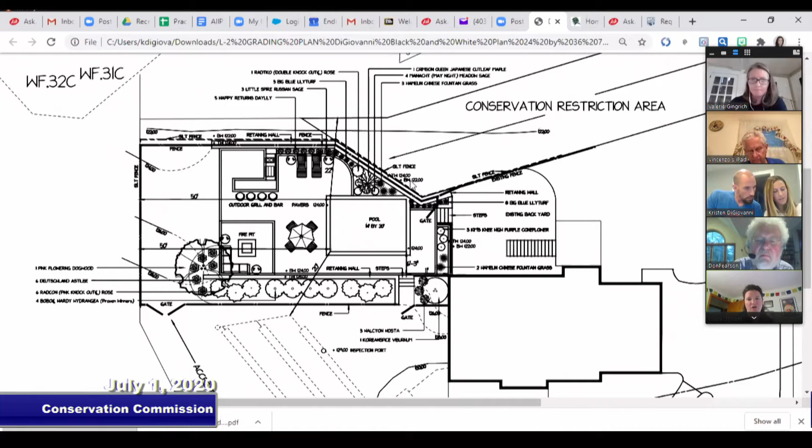Okay, so looking at the engineer's comments, there were pictures, but I couldn't really see the stone markers you mentioned for where this restriction area is. I wasn't sure which rocks they were. That's why I think it would be important to have that area staked out, because you can't see it, and the wall that they've already started building is within that area.

So the retaining wall you see makes that angled shape on this plan - that's the edge now. It was built in a straight line, and it went into that conservation restriction area. So then we'd be pulling it back. Right, okay.

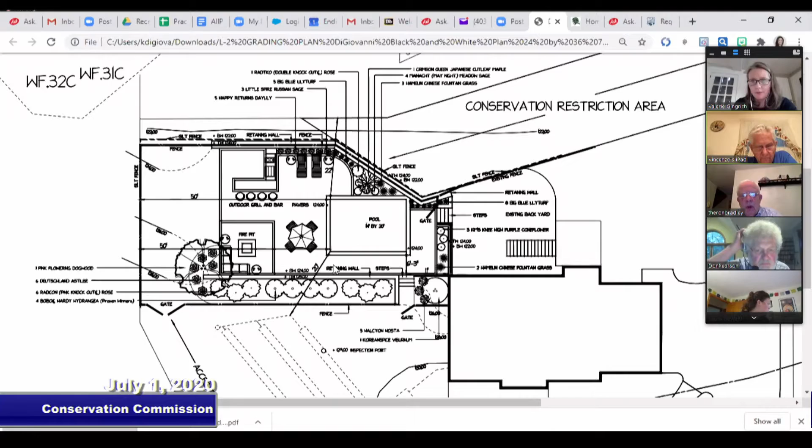So it does kind of an angled shape right along with the wall that they're proposing. Let me just look through my emails really quickly to see if I can find the plan I sent - we have an as-built plan for when the house was built, and I'll try to pull that up here. Here we go, let me just share my screen. Okay, so on this plan, this is the as-built plot plan that shows the conservation restriction area, which I've highlighted.

Yep, and you'll see that it does this angled line right here. So their proposed patio is back here and actually kind of runs into this area currently. So they're going to pull that back and follow this line to avoid this area. Okay.

I see the wetlands area, and it's not clear to me how far out that extends, whether 25 or 100 feet. Can I assume that's approximately the edge of the conservation restriction area? Well, you'll see this line right here - this is 67 feet from the wetland point here to the septic system. So using that as a gauge, I would guess that the work they're proposing is at least 30 plus feet from the wetland. Great.

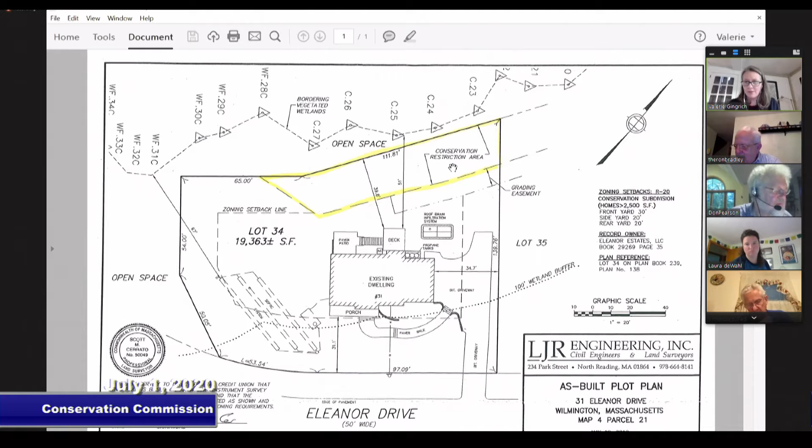Mr. Chairman, I'm not sure if we have anyone here to represent this tonight. I'm looking through the crowd and I don't see anyone, but if there is someone here for this, they can just raise their hand to indicate that, and I'll get started. Let me just stop sharing my screen.

This proposal is for a small concrete pad to place a hot tub on. This is in the buffer zone, an 8x8 concrete pad, and then a 12x12 deck extension in the back of the house. The BVW is about 55 feet away, so this is within the buffer zone but is quite a distance from the wetland.

Is it something we can go ahead with in the absence of the applicant? Yes, I think so.

I'll note that the application did state that work was proposed by hand tools, so they weren't proposing any erosion controls, and the topography didn't seem to indicate they would need them, but we can always condition that if you'd like. Did the engineer recommend erosion controls? Let's see. Yes, they suggested the applicant install temporary erosion controls, either staked hay bales or straw wattle, along the southerly side of the existing driveway. So yeah, they do recommend erosion controls and an as-built.

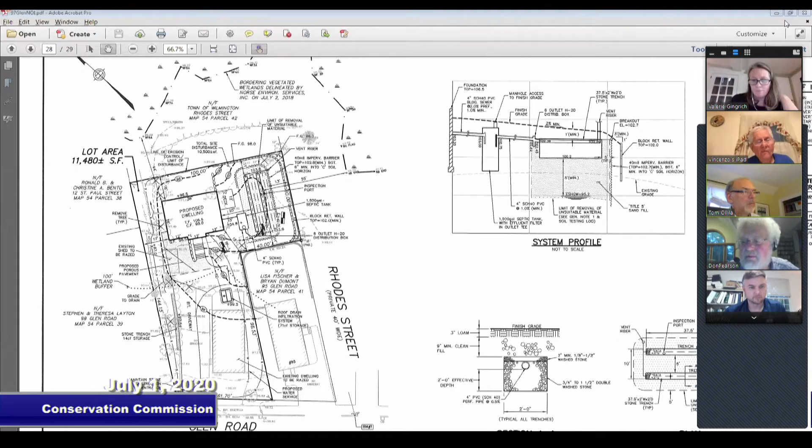So I'm looking for any questions or comments from the audience for 97 Glen Road. So far, Mr. Chairman, there are no raised hands. We do have a couple callers on the line, so maybe give a few seconds to let the TV catch up with our meeting.

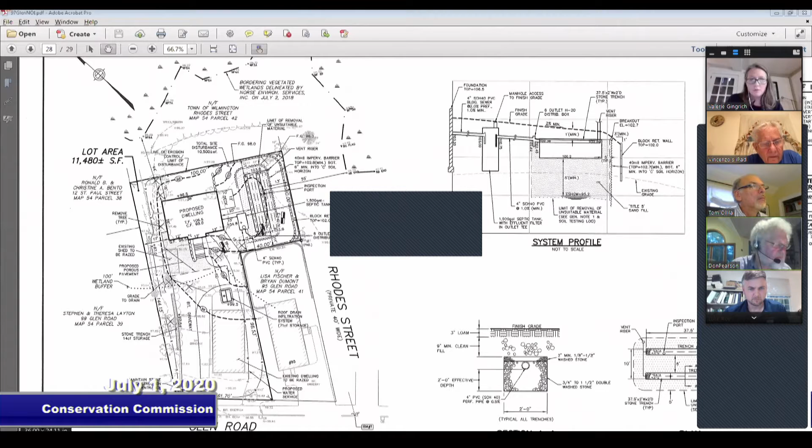No raised hands. Okay. So could I have a motion to continue the public hearing for the notice of intent for 97 Glen Road till the August 5th meeting?

Vinnie made the motion. Do I have a second? Second, Ron made the second. Voting, Tom? Yes. Mike, muted. Yes. Ron? Yes. Vinnie? Yes. Laura? Yes. And myself, yes.

So the next item is a public hearing for a notice of intent for 11 Kendall Street. Thank you. Again, Luke Roy, LJR Engineering, on behalf of the applicant, Michael Tachuk. This is a notice of intent we've submitted for 11 Kendall Street. Just let me pull it up here.

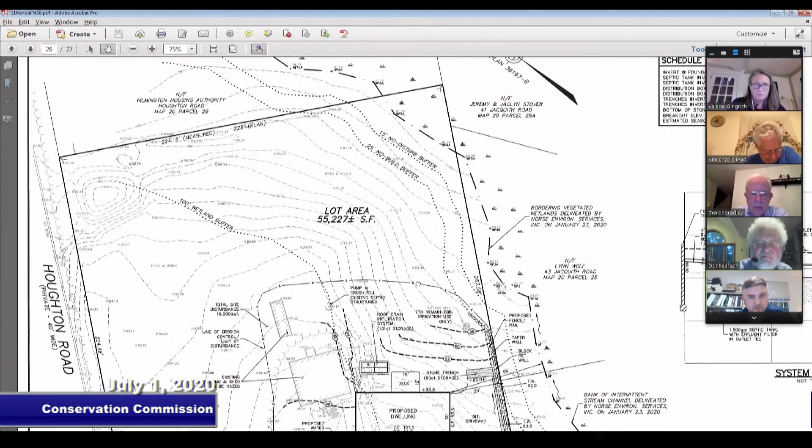This one is also in the groundwater protection district, and it has quite a bit of land area. So the percentages, if I remember correctly—where did I put that chart—it was just at 6.5% of the lot area that is impervious, with the house roof and the driveway area for the lot as it will be constituted for this development. So that's the proposal at this time, and I'd be happy to answer any questions.

Thank you, Luke. Valerie? Sure. Thanks, Mr. Chairman. Again, Bill Holt from the Engineering Division did a site visit to look at the wetland lines and confirmed that they were in the appropriate place. We did receive some comments from the Engineering Division, geared more towards the proposed retaining wall on the side property line adjacent to the 25-foot no-build.

That wall will be certified, designed by a structural engineer, and that will be submitted for review prior to building permit.

I had a question, Luke. It was a little unclear whether the infiltration trench, the stone trench, was going right up to that retaining wall, and whether infiltration should be encouraged along that wall, or if it would be designed to allow for that. Also, could the driveway and dwelling shift a little to the left on our screen, to pull it away from that property line, and maybe lower that wall or eliminate parts of it. Those were the questions, and also confirming that the wall could be constructed entirely within the property boundary as proposed.

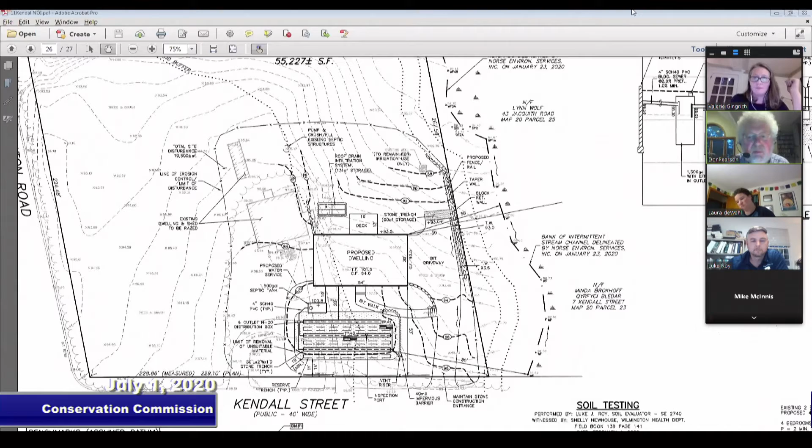No raised hands. Okay, I'm looking for a motion to continue the public hearing for the notice of intent for 11 Kendall Street to the August 5th meeting. So moved, thank you Laura. Second, Vinny, thank you very much.

On to the voting, Mike. Muted, yes. Tom, yes. Ron, yes. Vinny, yes. Laura, yes. Myself, yes. Thank you. Welcome.

The next item on the agenda is a request for an amendment to the order of conditions for 93 McDonald Road.

Good evening, for the record my name is Elizabeth Wallace from Hayes Engineering. We are asking the Conservation Commission to consider an amendment to the order of conditions to allow the inclusion of a constructed patio to be accepted and included in the order of conditions. The order of conditions was issued in May of 2018, and it basically allowed the construction of a single-family house and all appurtenances. If you're kind enough to allow me to share my screen, it would be easier to point at a plan. Hold on a second.

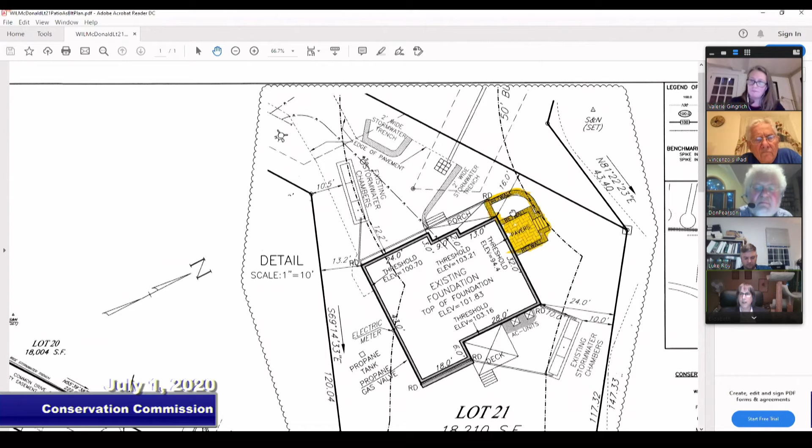Besides the pavers, are we doing anything else to remove any rain liquid that accumulates down there? I don't know, there is this stormwater trench here that will carry the water away. There was also another little trench added at the time, I don't know if it's still there, but when we replace the pavers with pervious pavers, that will allow the rain to infiltrate into the ground.

Okay, I'm all set. Tom, no questions? Laura, no questions. Mike, all set. Ron, good with it. Okay, as am I. Are there any questions or comments from the audience?

In fact, do we need to ask Valerie for an amendment? Yeah, you would want to ask for the amendment. All right, anyone interested in commenting from the public on 93 McDonald Road? So far, Mr. Chairman, we don't have any raised hands so far. And we still do not have any raised hands. Okay.

May I have a motion then to— So, Mr. Chairman, if you'd like, since this is an amendment to the existing order, all we do is reference the new plans, and in this case, we would require that the pavers be pervious, but all of the rest of the order stays the same as the original document. So it's pretty straightforward. If you would like to close the hearing and issue this amendment, I think you could without seeing it because it's so simple. But if you'd like to wait till next time, that's up to you.

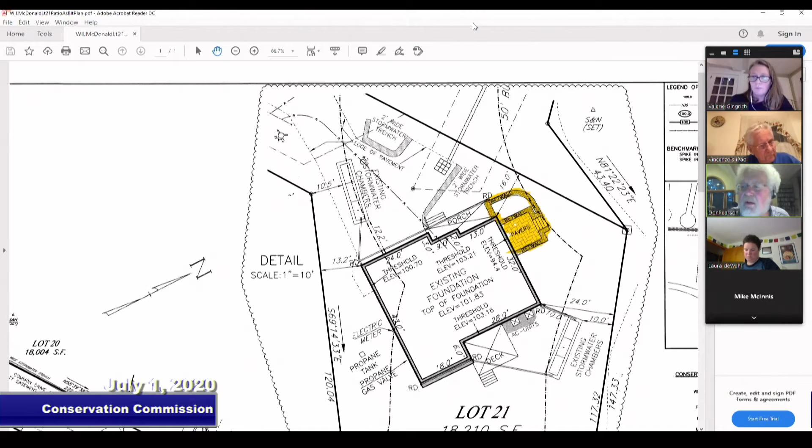So we are now going to have a motion to approve the request for amendment to the order of conditions for 93 McDonald Road. And you would want to condition that the pavers be pervious, correct? That's correct, yes. Okay, great. Thank you. Anyone make that motion?

So moved, Vinny has made the motion. A second, please. Second, Ron, thank you. For the vote: Tom, in favor. Ron, in favor. Laura, in favor. Vinny, in favor. Mike, in favor. And myself, yes, in favor.

The next item is marked as requesting to continue. Is that okay? Correct. Okay, they've asked to continue to the August 5th meeting. Fine. I'll make a motion to continue the public hearing for a request for amendment to order of conditions for 635 Main Street to the August 5th meeting. May I have a second?

Second, thank you. For a vote: Mike, favor. Laura, favor. Tom, in favor. Ron, favor. Vinny, in favor. And myself, yes.

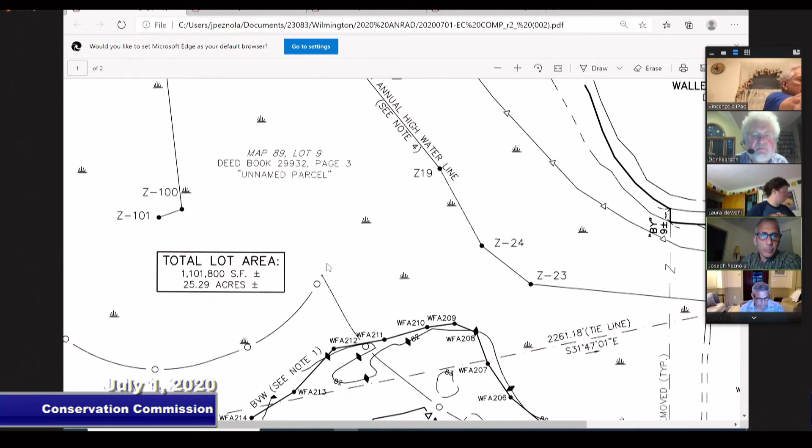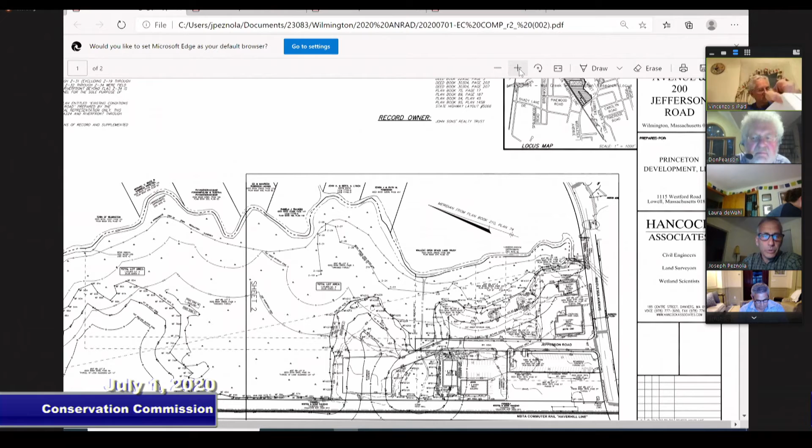Maybe I'll just zoom out a little bit. Middlesex Ave is to our right, and here the existing retail and the back parking lot are here. The BVW line kind of winds its way through here, and then the Lubbers Brook is our northerly property line, and we are talking about the Z line, which is the riverfront line, and in particular, back here on our west portion, we had originally just stopped at Z31 because we felt that that was sufficient to delineate the riverfront in the area that we needed it to in the project area.

There was a call to extend that. We extended it in a direct westerly direction with 32, 33, and 34. There was discussion and some maybe disagreements with that delineation. So we moved in a southerly direction, looking in this wetland area for evidence of flow, whether it was soil erosion around tree roots or water staining or what have you.

We kind of came back to around this location, and there seemed, looking out to the west, there seemed to be some evidence of a change. And on the ground in the muck, there was maybe a reduction in some of the evidence of water movement, which is really what we're looking for. We're looking for mean annual high that's related to the movement of the river.

So we talked about setting flags. We set a flag, which we call Z100, and then we set Z101 as kind of a directional flag to see what that would cast for a riverfront. And as you see, when we look in this direction, we have the inner riparian and we have the 200 foot, and that riverfront line that is kind of driven by Z24 does take an angle and start to head up this way, but it quickly passes over the BVW line. So we feel that the delineation is sufficient.

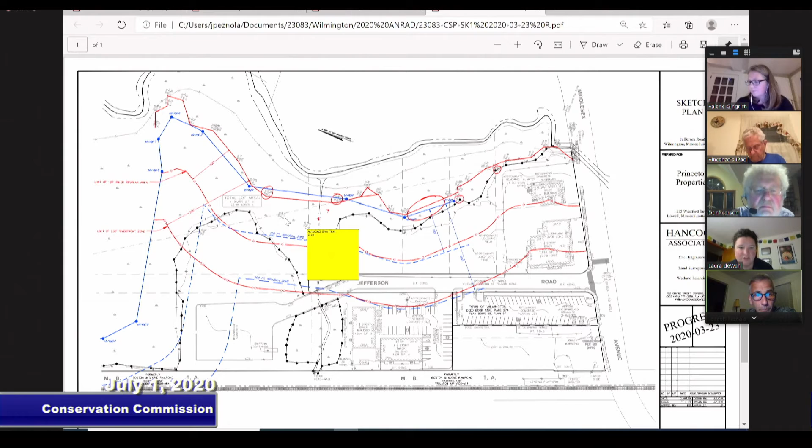Do you have a plan that has the other flags, just to show the other commission members? Which flags are you talking about, Don? 21, 22. On the plan that's up right now, they're right here. 22. Okay, I just can't see them there. But then that's a lot closer.

There's little red X's that I'm assuming represent 19 and 20. So I wouldn't think that if we discounted the existence of the intermittent stream temporarily, the high water would go all the way up to 22 and 21, but I do think it would come out within Z18.

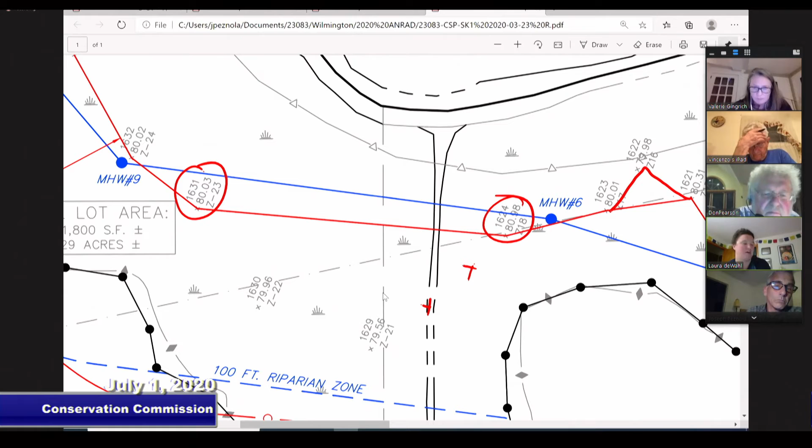To which? I'm sorry, Laura. So right now you have the jump across from Z18 to Z23, and right there the oxbow, the elbow on the river, is bigger than in other places. Especially the upstream is a little straighter, so you'd have more velocity coming in. I'm trying to gesture at the drawing, that's not working.

So you'd have more velocity coming into that elbow. I would almost like to see your jump across go from Z18, Z19, and then to Z23, or even up to 20 to 23. Not necessarily including Z21 or Z22, but I'd like to see that area come out a little more to show the velocity of the stream coming in, especially at high water, would likely come out further than where you currently have the jump across.

Yeah, so I see your point. So from Z20, which is here, to okay, Z23? Yeah, or the next X over. Yeah, I couldn't make up my mind on which one I liked better, but just one of those.

Yeah, because I could definitely see water pushing that far up the intermittent stream in high water flood conditions. And then I think, with respect to you guys, it doesn't really change the area too much, but it does make a difference in terms of showing where the high water is most likely. Yeah.

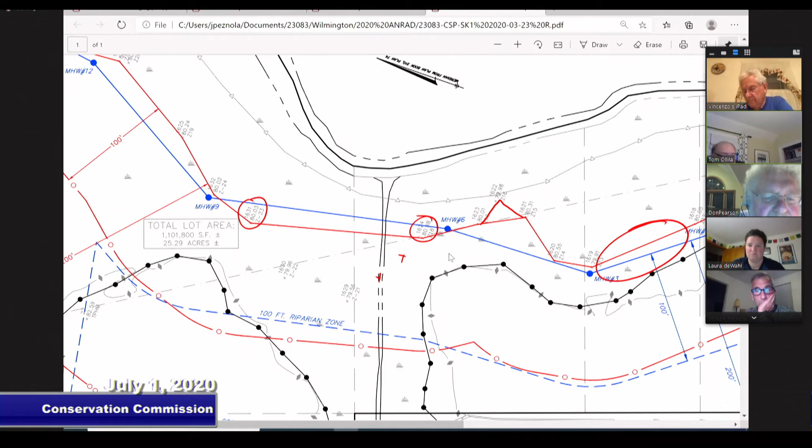I mean, our position is that there's a realization that you have the muck line and things happening in here. So going back to our premise, there are flags that we're not utilizing. Looking back at the settlement plan and figuring it was good enough for an ORAD, it was good enough for this, and that's our position.

I think we could work with a flag in this location that kind of moved towards 23. I just don't, logistically, we'd need to finish this up. So tonight, I just...

And like I get what you're saying about the previous line for the ORAD, but looking at the shape of the Lubbers Brook as it comes into there, it's coming out of a pretty straight shot that would, if you follow that down, kind of go up towards the intermittent stream.

And so where you have the high water line, like Z23 to Z28, is kind of far out. And then we cut in really close where this area of potentially higher velocity would be coming through. So I think it doesn't make sense. I mean, knowing the intermittent stream is there and there's probably going to be influence, but in terms of a high water condition, I think you would definitely be having water going further out than Z18.

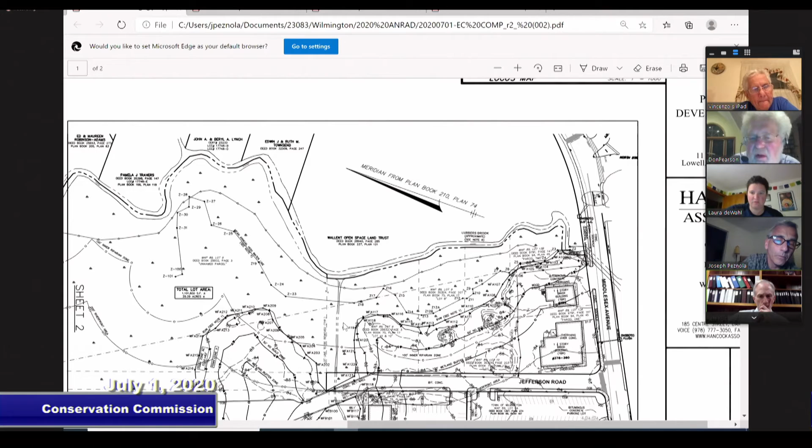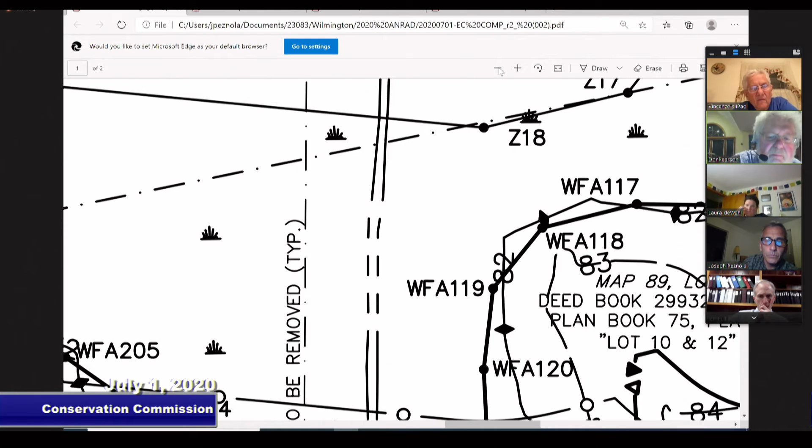Because I also feel that going straight across is not realistic. Move a little bit to... there we go. The line that's pretty much perpendicular to the river.

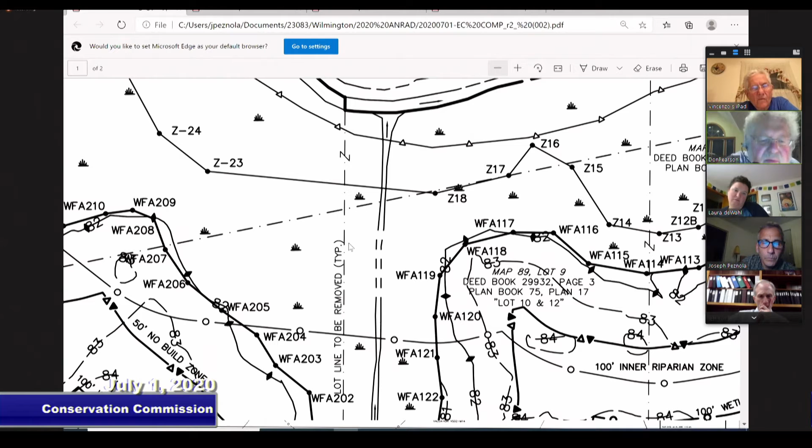Yeah, how about the intersection of these two lines? Yeah, that'd be as real as anything. And then it's reproducible as far as, you have this plan on the record. We can go to that point and we don't have to, we can move forward.

What's the large dashed line? Which one? Yeah, that one. Moving this way? Yes, that's right, at an angle. Yeah, it's a traverse line, a survey traverse line. Okay, so the intersection of that and the vertical.

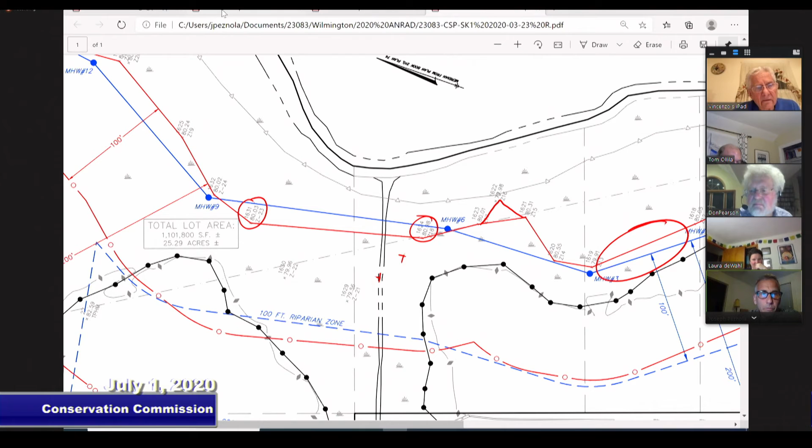Who did that? And our response to that comment—Vinny's reading from the BSC letter, which is dated today. Your letter, Joe, today that you responded to BSC's comment. That's what I believe Vinny is responding to. Right, just get to that point, it's down at the very end.

What's the range of flags they're questioning, Vinny? Can you just say that again? Z1, Z31? Okay, so it's questioning Z31 to Z34. There you go. I'm having problems scrolling through this.

While Joe's trying to find that, this is David Cowell, I'm a senior wetland scientist with Hancock Associates. Go ahead, Dave. This response earlier today, I've attested that I have walked every single flag out there. In my professional opinion, I agree with the flag series out there. So all of these flags have been reviewed by a senior qualified wetland scientist.

Essentially, what BSC is saying is that it should have been originally done by a qualified wetland scientist. The way that we did it, we went out and instructed the survey crew what they were doing. We contend that a professional land surveyor is highly qualified to gather data—that's what they do for a living. So they were instructed to follow the leaf stain line, the muck line, what have you, to locate that as they move through. Then David Cowell, senior wetland scientist, went out and verified that those flags were set in the appropriate place. I don't think the original letter from BSC had any major issues with the location. They did say maybe put some more flags in there, between 10 and 13, and we did that.

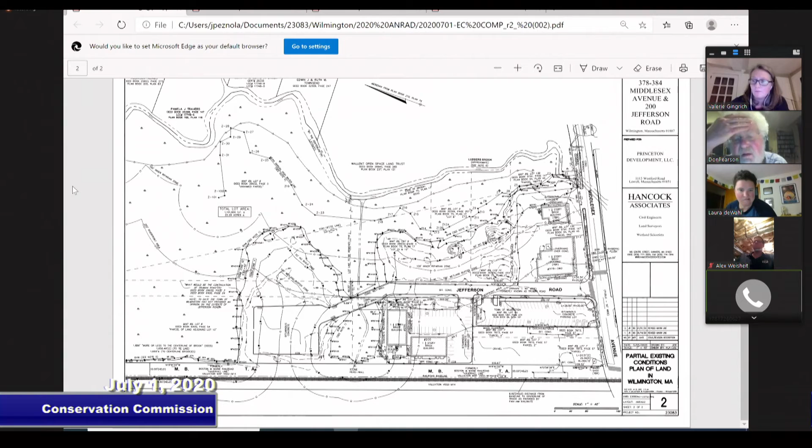The very first thing I'd like to address is that in the last public hearing with the applicant, there was a comment that the original ANRAD was silent on the mean annual high water line and the riverfront area, and that's absolutely completely false. At that time we couldn't locate our copy, but we did locate one from one of our members, and that is absolutely not true, that the Conservation Commission was actually really vocal about the mean annual high water line.

And once again, that commission agreed with the Headwater Stream Team, and there was only one area of contention, which was not relevant to this site, but relevant over to where the island was, where there's a swales area, which we still think could potentially impact this site, or could impact any future filings if they're going to file an NOI down the road. I would caution them that when they file the NOI, they might want to make sure the riverfront area is delineated properly as it relates to where they want to do their work. So I just want to put that out there, because that could be a bone of contention and end up in appeal, because that could definitely put riverfront area on this site.

The second thing I'd like to address is the USGS, the Mass GIS map that I supplied to the commission. It's really important to look at that, because I was kind of shocked myself. When I looked at the ANRAD, I started to think, because on the original ANRAD, an intermittent stream was never identified on this site. It wasn't identified in the ORAD process. And I asked whether or not it's going to be identified in the ANRAD as an intermittent stream. Is that part of the resource area delineation?

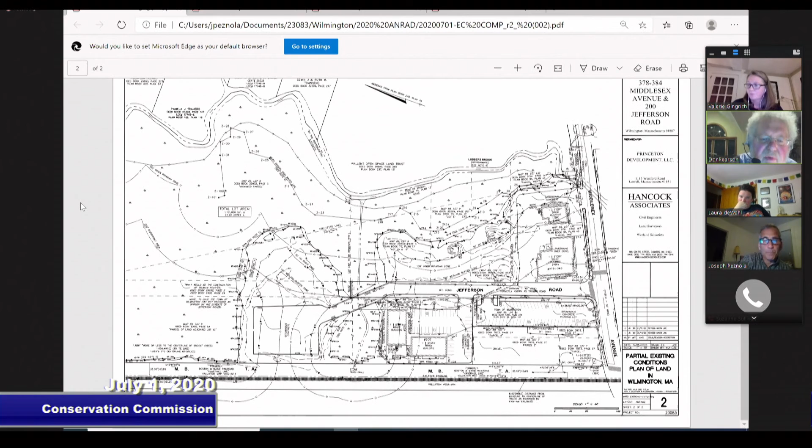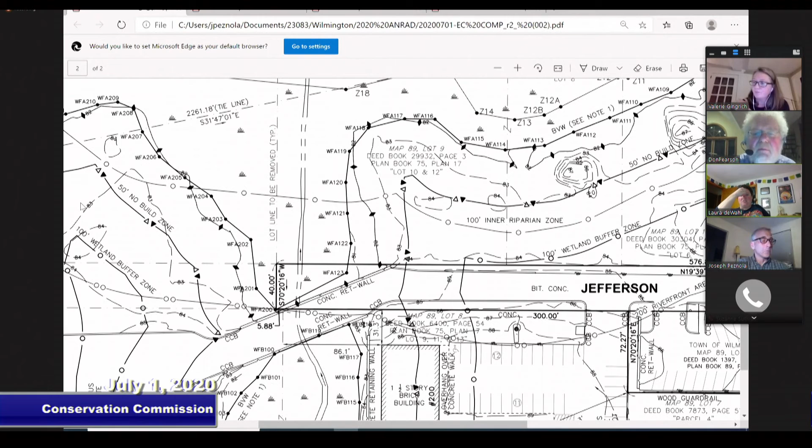Could you zoom in for a second to the intermittent stream, just so everyone is comfortable with what they see there? Yeah Don, I would agree with Joe that on the plan it's not specifically called out as an intermittent stream. I'm not looking at the legend right now. I think it's just showing that there's a feature in the wetland area, but it doesn't change - it has no impact on the decisions we will be making tonight. So it's kind of a tangent. Go up a little bit too, again, just pan up a bit.

Yeah, there you go. I would say, like in the NOI, if it's still there, we may want clarification in case that changes any decisions we make in the future. But in terms of right now, we're making a decision of where the wetland is, where the riverfront area is, and where the land subject to flooding are, and that intermittent stream doesn't impact that. And again, I think we had said earlier that the area between Z18 and Z23 was adjusted, not because of anything to do with the intermittent stream, but just to conform more with the river channel, the sinuosity of the river, and not be just a straight line. So I'm okay with it staying there.

Are we ready? Are there any hands? We do have Suzanne with her hand raised one more time, if you'd like to hear from her. Okay. Hi Suzanne. I did not raise my hand. Okay, all right, have a good fourth.

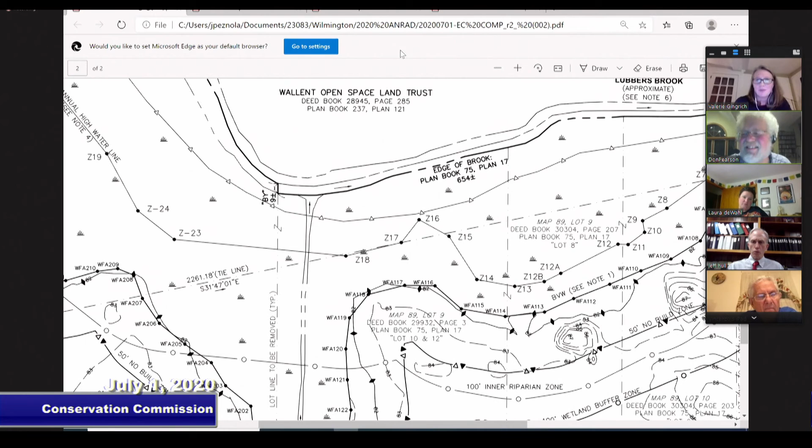Can I see the sort of Jeopardy kind of lineup again? The gallery? Sure, Joe, if you would. I'll just do it. Oh, beautiful, thank you.

So, to the vote to close the hearing: Vinny? I'm going to say no, I'm not happy. Okay, no. Who else? Don? I'm okay with closing the hearing at this point. Laura? I'll vote yes. And I'll vote yes as well. I'm sorry, if that was for closing the hearing. Closing the hearing, yeah, close it. So you're voting in favor of closing the hearing. So it's 4-0 to close the hearing.

Okay, the next motion will be to issue the ANRAD as shown on the... help me with the reference, Valerie. The most recent plan dated... Sure, this plan is dated today, July 1st, 2020. Any other identifying information you want to read into the record? No, so it's the partial existing conditions plan of land in Wilmington, Mass. The original date on it is May 5th, 2020, and the last revision date is July 1st, 2020.